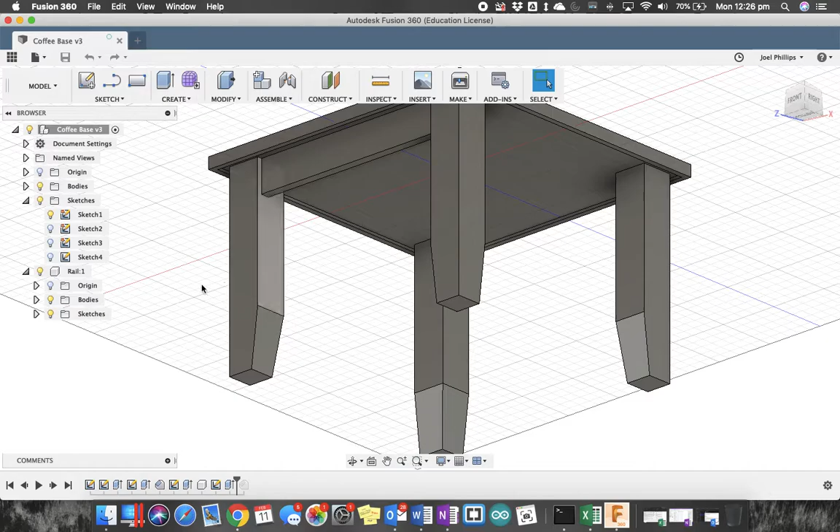Drawing one of these rails by itself. When we drew the legs, we used a method just to build up from a single model and keep on drawing onto that single model, and the legs are actually part of the table body. If you're familiar with Inventor or another program, you'd notice that I've drawn this rail as a separate part and then brought it into the assembly, which sometimes is a better way of working, and it's probably important to understand both skills.

So today we're going to draw the rail to go in between here as a separate part, and then we'll bring it in and put it in with some joints.

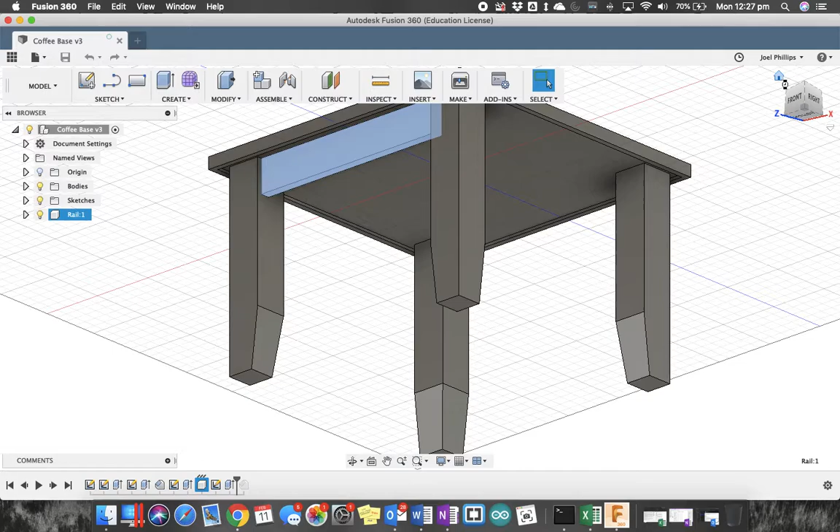First off, when I press my home view here, you notice that I get to a nice view of the table, but if you're getting to something underneath it or something like that, what you can do is choose the front of the coffee table, and then the top right hand corner, or any of them really, and then right click and say set current view as home fit to view.

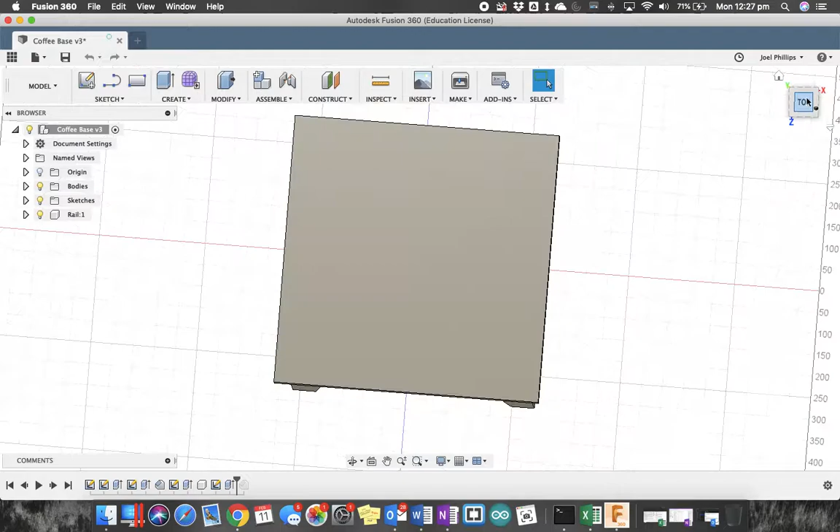So when I press home now, that's the view that comes up. And the same thing, if you've got issues with, say, the top of it not actually being called the top, you could look at the top first and then say set current view as top, and that helps to reset the views, which is sometimes nice to be able to get your head around where things are.

So in a new design, a new tab over here, we're going to start a rail. Now I'm going to take advantage of using that mid plane again, like I did with the coffee table, because we're going to learn how to do a mirror soon. So whilst we could choose a 2-point rectangle, I'm going to choose a rectangle as a center point rectangle.

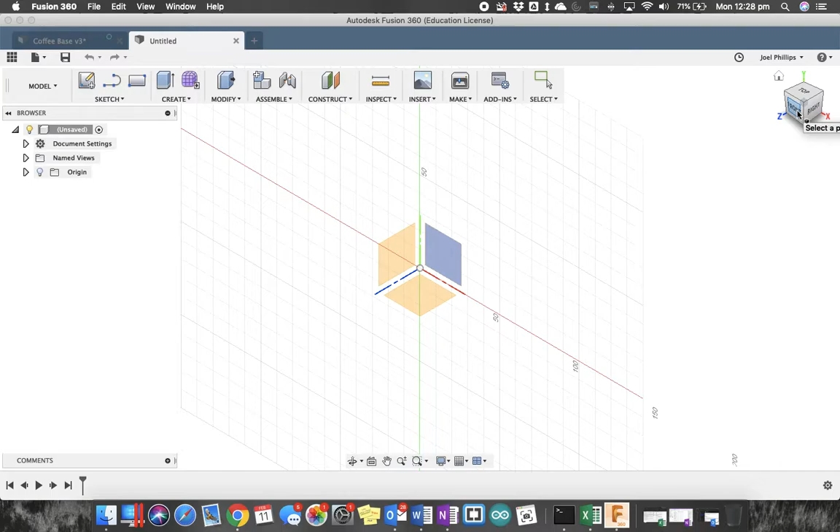It doesn't really matter where I draw, but I'm going to draw from the front here, click on that sketch, and from the center point I'm going to go out to the side. It's 70 high and 430, I think, between the legs, or at least that is what I chose.

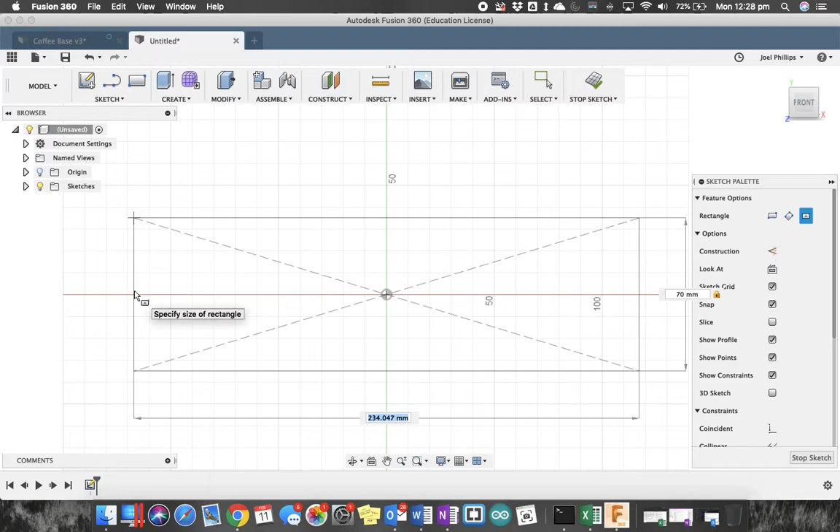Notice that when I move my mouse after I put that dimension in, it stuffed up the 430, so you have to press enter before you move your mouse. So I'll do that again, 430, and then enter, and just go to a 3D view, stop sketch, and I can extrude that out 19 millimeters.

So there's my rail. Notice that it is either side of the blue line, which is the plane in the middle. We're going to use that to put the dowels in and then mirror them across to the other side, so you only have to draw them once.

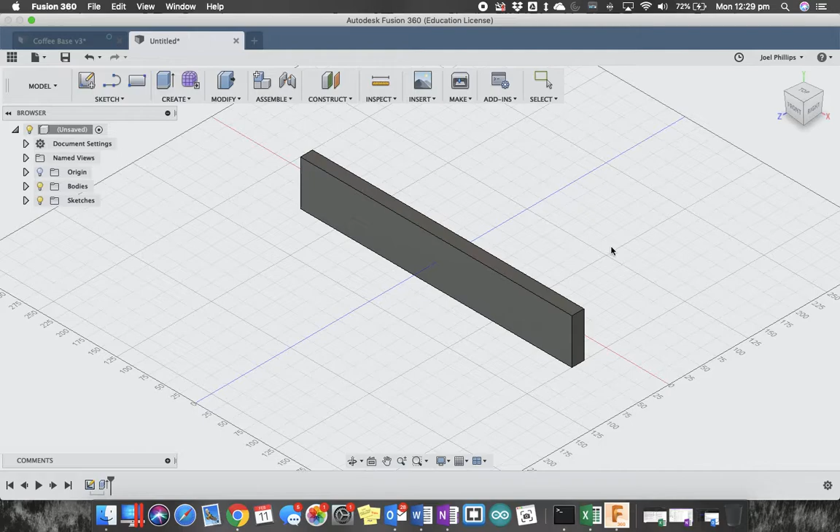But for now we're going to leave it like it is and put it into our assembly. So we need to save that, and we're going to call it table rail perhaps, and it's in my coffee table folder. So I'll press save, go back to the coffee table, and if I pull out this little menu here, you can see this one called table rail is the one that I just created.

So I need to right click on that and say insert into current design, and that brings it into the current design. Once it's in there, I could copy and paste it a couple of times. The offsets don't really matter at the moment because we're going to put some joints in there anyway. So I'm going to put this one, because I've already got one there, I'm going to put this one in between those two legs, and it's a little bit different to what we've experienced with Inventor in the past.

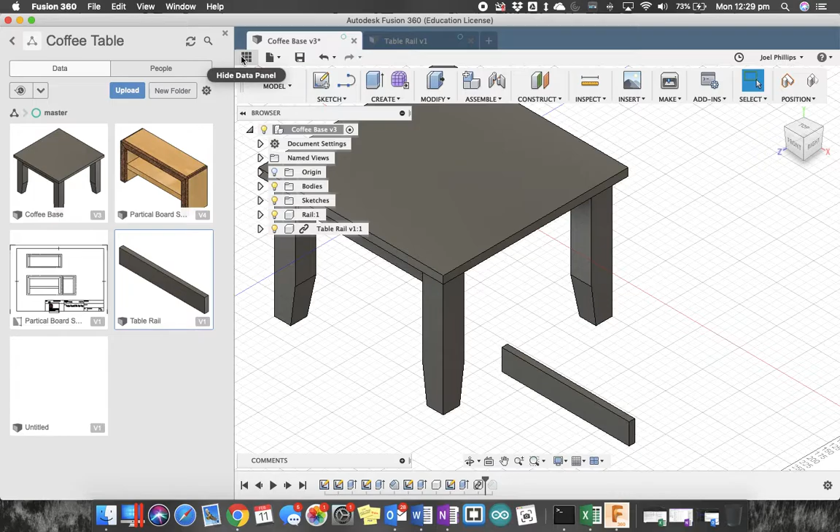Usually we'd try and constrain three faces to be aligned with each other, flush, or mated with each other. Instead, for this one we're going to choose joint. It doesn't matter that it wants to capture its current position - I probably prefer to drag things away and then put them back properly, so I can say capture position.

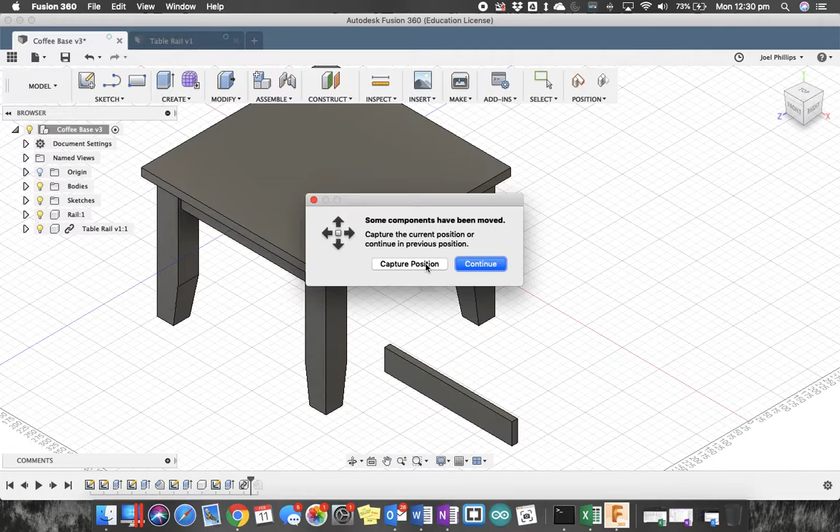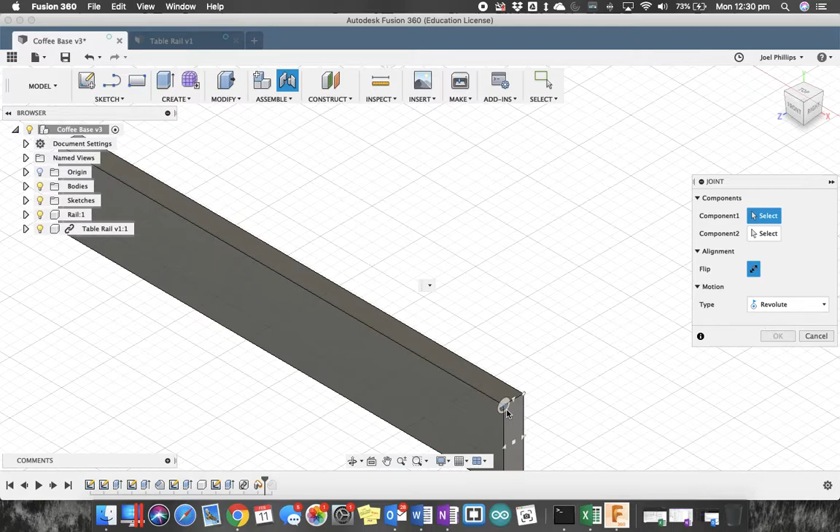The components I want to choose are the rail and the leg, but it's really important where I click. If I click on the two faces like we would have in Inventor, I don't really have a reference point to constrain it properly. So what I've found, together with Mr. Hunt, is that if we choose the corner first - rather than just choosing that face, I hover over the face and choose the corner there - then I can get a reference point to this leg.

So again, that face, but up into the corner of that face - you can see it's put itself nicely right up into that corner, and it sort of did a rotate around that corner to see exactly where it was going to be located. And then I can put my little offsets in here.

So I think probably in the Z direction - no, that's the wrong one because it's gone the wrong way, so I'll put that back to 0. Change this one on the Y - no, again wrong one. So this one needs to be offset in the X direction, and that's gone the wrong way, so I go to -5.

You could just use those push-pull arrows to find out which one needs to move, and then just round the dimension off here, so it's 5mm in. That sounds okay - you could probably do 3mm actually, that's more reasonable to get that little offset there, like you would have for your coffee table rails.

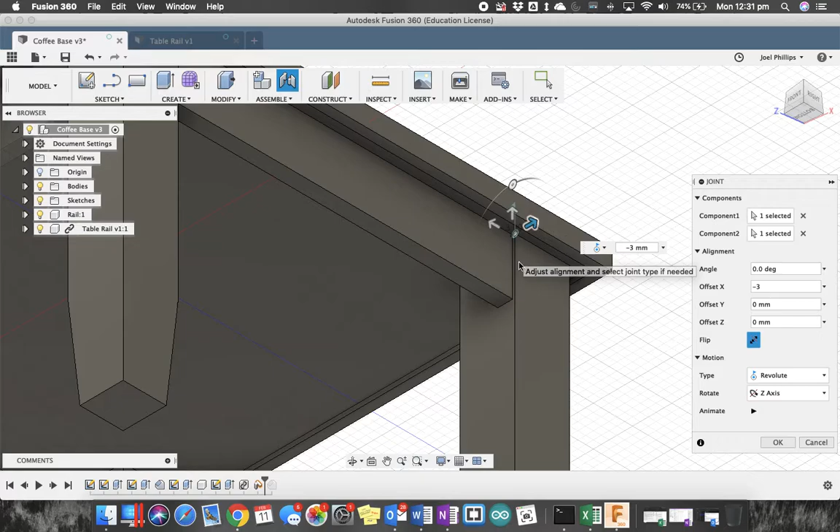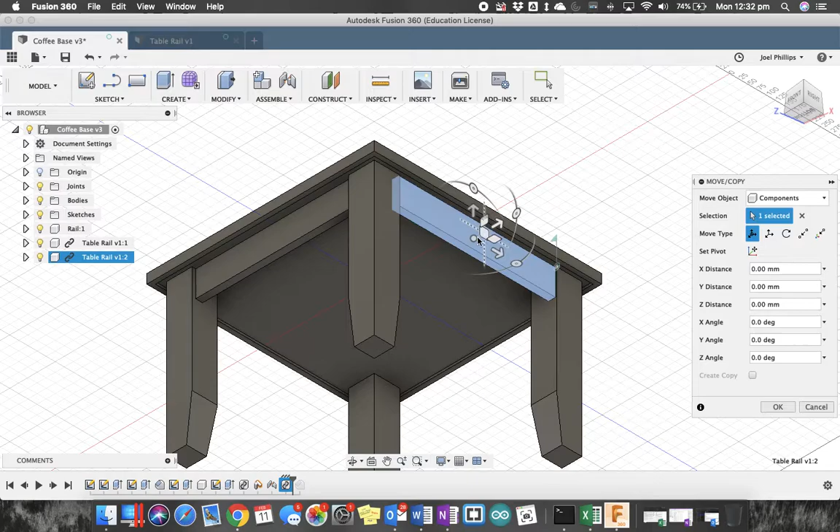So that's one rail put in. I won't go around and do that 4 times, but what I will show you is I can right click on that and copy, then paste it in a second time. So there's a second rail there, and then I could start that procedure again, putting that second rail in here.

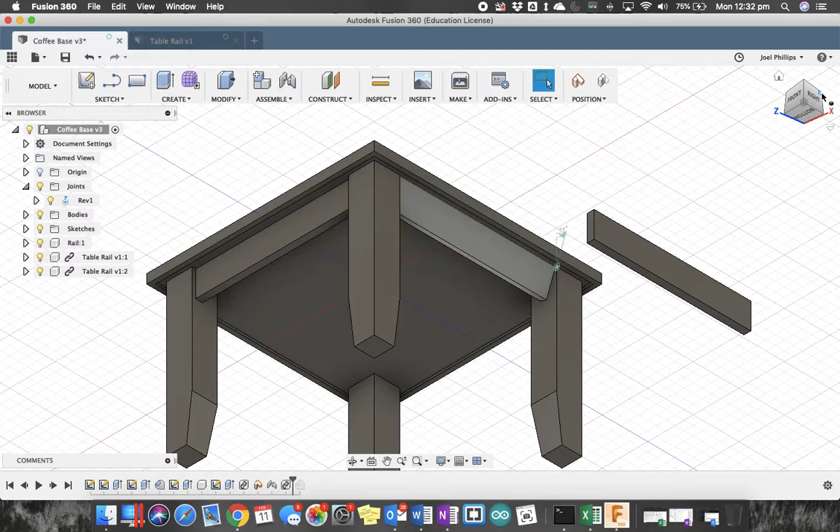Now I just noticed that I selected a revolve joint - that was not correct actually. That's why it revolved, and it probably still is going to swing around, and we don't want that. So I might quickly do this joint as well - it's just because that's what it was left on last time. It was on Revolute, but I want it on rigid, so I'm just going to do that same process and show you how it should work.

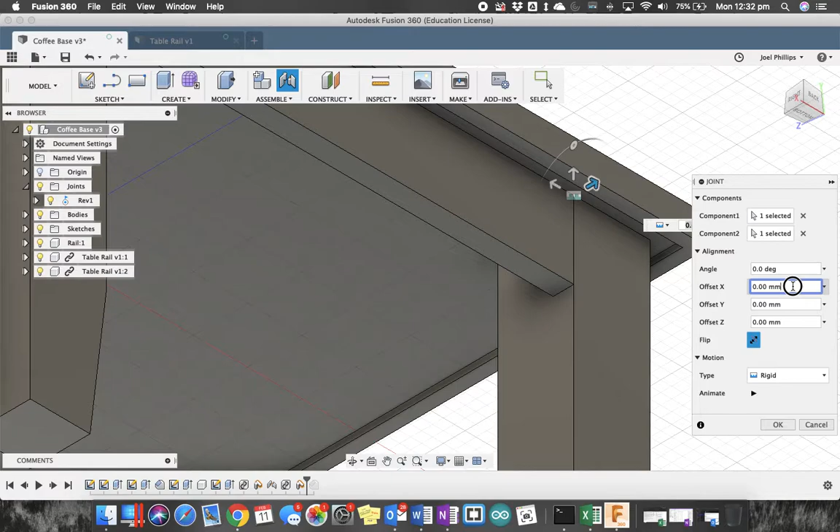So, zoom in on the face, just choosing the corner, and again on this one, zooming in on the face and choosing the corner. That should bring it in nice and rigid there like it has, and I'll change that to -3 actually. Okay, so that rigid joint there is much better - that's what we want for the rail. I don't want the revolve there, but at least it shows you how that works.

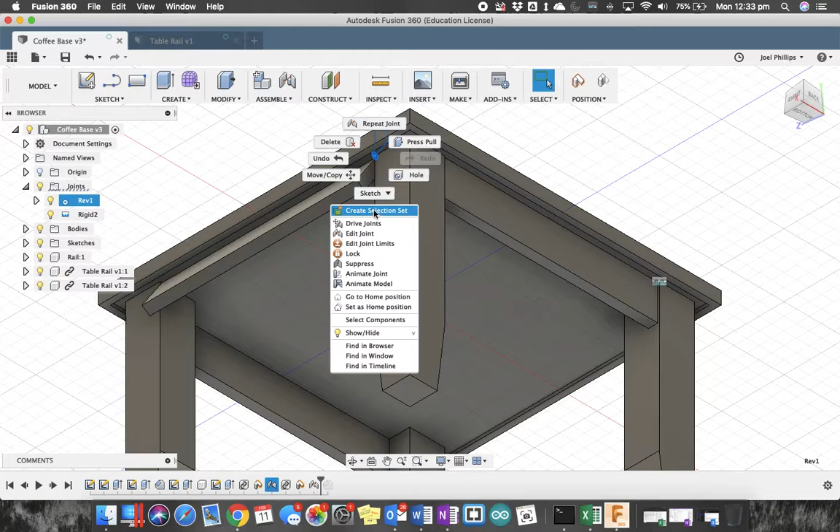Some of you might like to put a drawer in so you can explore the slider joint, but we'll have a look at that together later on. So I'm going to delete that joint and say delete, and I can try and put that one back in again properly. Hopefully that was easy enough to follow.

Next video we'll have a quick look at making the 3 dowels and mirroring them to the other side.